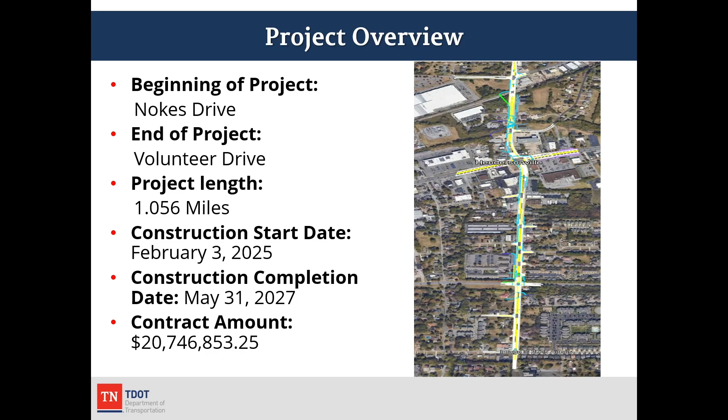So why are we doing this? I mentioned this congestion, safety, and to support the growth of the community. To talk on the traffic side real quick, in 2024 we had close to 13,000 vehicles a day that travel through this corridor. You forecast it out 20 years, it's going to be around 17,000 vehicles a day that comes through here. So you can see the significant improvement this is making, regarding that intersection where they're not sitting through 2 signals on the state highway.

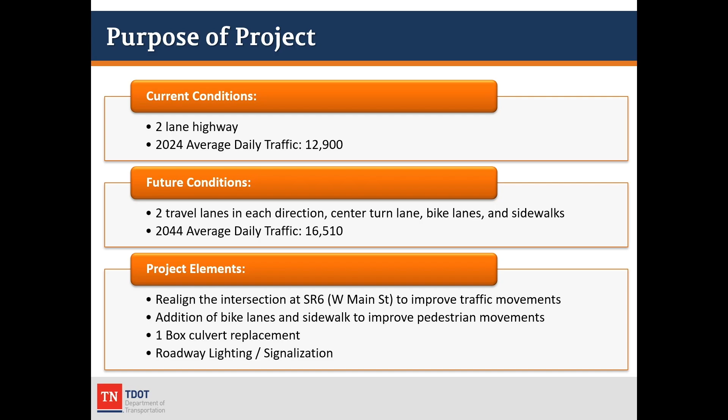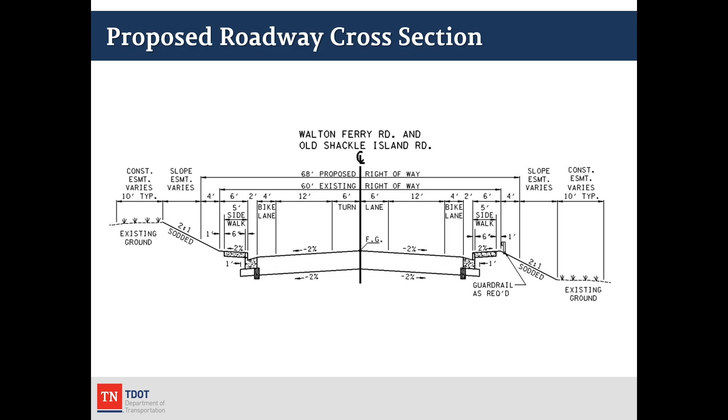Construction is slated to begin this February. I do ask for our community that we have some grace as this project is going, that there will be some times where you may be sitting through a little congestion as our contractor's working hard and utility relocations are happening at the time. It looks like the estimated completion will be the spring, summer of 2027.

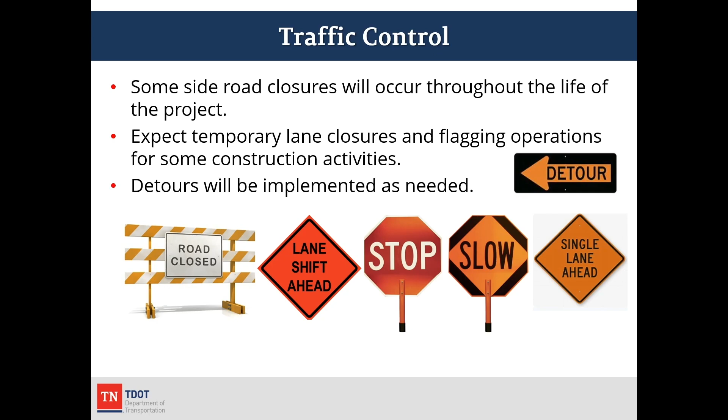So what to expect from a traffic impact standpoint as this project is moving along: you can expect temporary lane closures and flagging operations, as well as some side road closures as they do some tie-ins to the new widening project. Detours will be implemented as needed for this to happen.

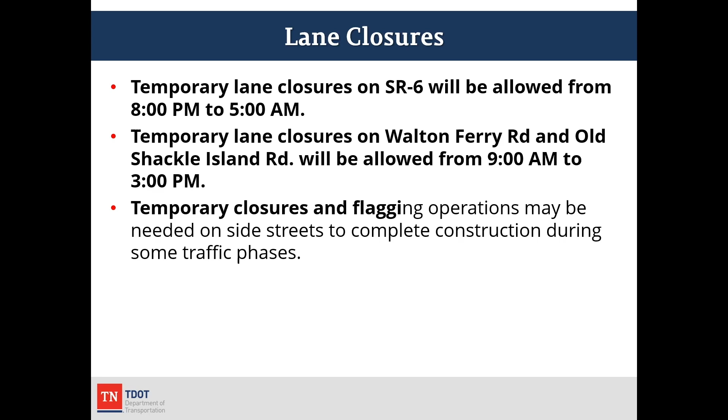Lane closures on State Route 6, West Main Street, will be allowed from 8 p.m. to 5 a.m. So that'd be the nighttime closure, so be aware of that. Lane closures along Walton Ferry Road and Old Shackle Island will be allowed during the daytime from 9 a.m. to 3 p.m., and they'll be under some flagging operations as needed throughout that process.

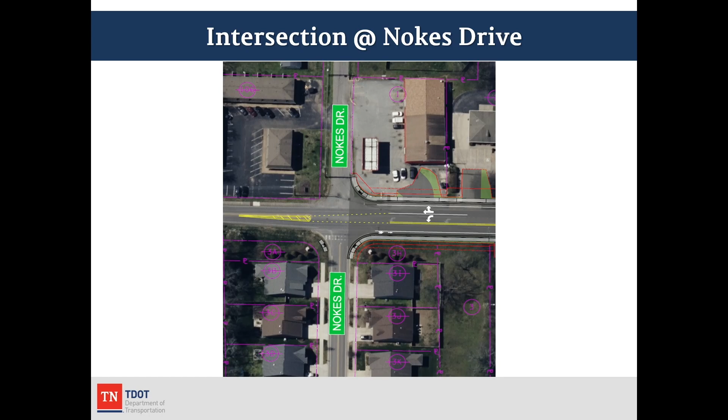We have a project website that will be set up and updated weekly to provide this information to the public. We feel it is imperative that you're aware of any upcoming impacts to your travel patterns so you can plan accordingly as you know these are coming.

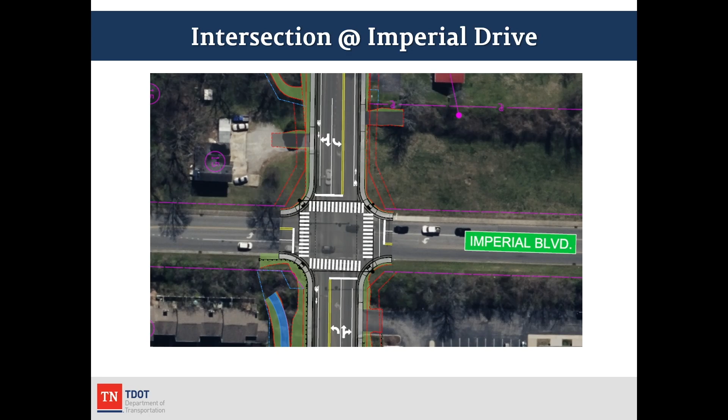We're all sitting down, I do want to introduce a few folks that are here to help you with any questions you have as we break apart.

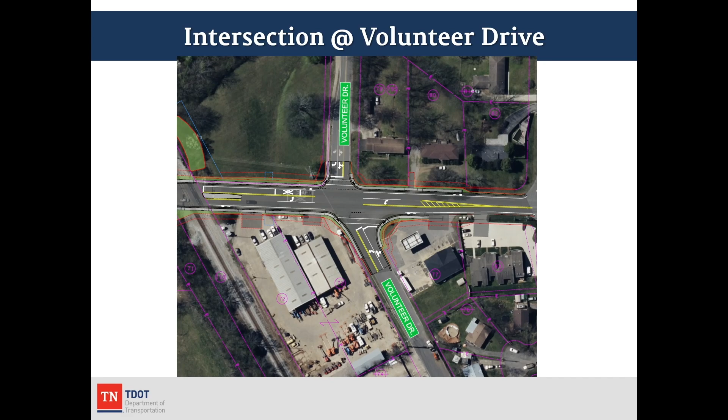The TDOT website where this information will be posted, there's a QR code on the slideshow, so be sure to snag it. It's tn.gov/TDOT/projects. You can also Google Walton Ferry Road project, you'll probably go right to it. That's where you'll find the most up-to-date information being relayed. Please, last thing, if you didn't sign in, please sign in on the sign-in sheet so you'll get on the newsletter and the monthly update. So multiple resources to get information, and the slideshow will continue running to give information.

Lastly, I'll say it, my team says it, we're excited this project is out the door from the pre-construction side. We're happy to pass it over to the Rogers Group to deliver this project and get this improvement to the community.